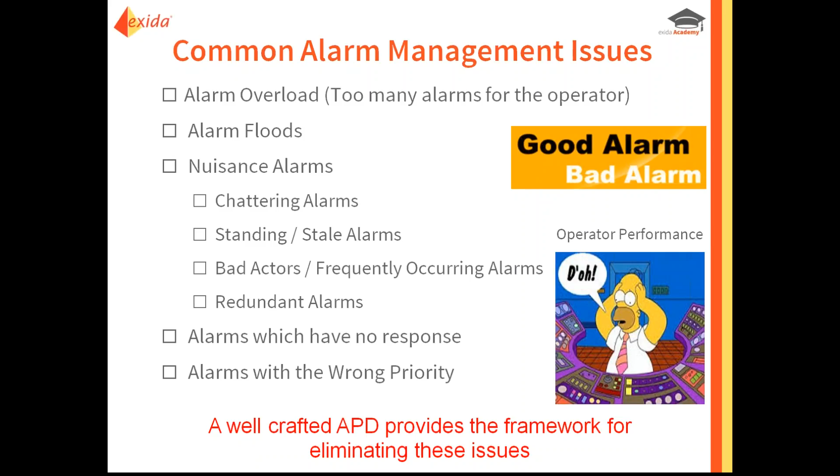So having an effective alarm management system is key to help your operators do their job the best that they can. And as I mentioned, one of the best ways is to start with an alarm management philosophy.

So let's turn our attention to the documents that define what we should do, the standards and their guidelines. Looking at the history of how that has evolved over time, the first alarm management document was really EEMUA 191, which came out in 1999 as a result of the Milford Haven explosion in the UK. That raised awareness to the issues and problems with alarm management and the need to provide solutions.

In 2009 in the US, the ISA 18.2 alarm management standard was released. This was a big difference from EEMUA 191, which was just a guideline and didn't necessarily have regulatory authority behind it, although it was treated kind of as a standard in some places. But the first true standard was really ISA 18.2 in 2009.

After that came out, there was a series of technical reports defined and created by the ISA team, which went into more detail about some of the specific elements of the alarm standard. The ISA 18.2 standard was then used as the starting point for the creation of an international standard, IEC 62682, which was published in October of 2014. The IEC standard builds on what was in ISA 18.2 and makes some changes, some of which we'll talk about. And now, every 5 years, standards need to be reviewed and updated.

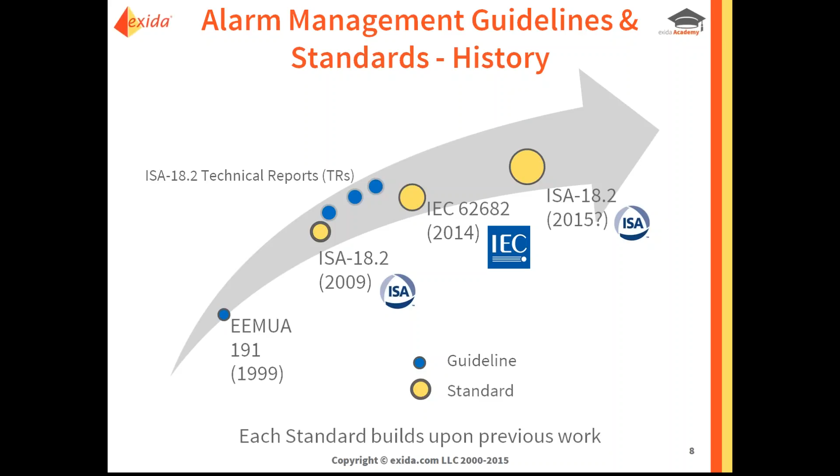So we're actually in the process of reviewing and updating the ISA 18.2 standard, and what we're starting with as input for changes are the new things that came about in the IEC standard. Hopefully what you can see is that this is an evolving process. Each new standard builds on what was done with the previous work. In general, we try not to conflict with what was done, but to build upon and add to it, and I think you'll find that with the IEC standard, as well as what's coming in the new version of the ISA 18.2 standard.

So for this discussion, we will focus primarily on the 2009 version of ISA and the recently released IEC standard. Both define a concept called the alarm management lifecycle, which is the workflow for alarm management. It describes the key activities, the key stages of the lifecycle, what happens during each of these, and how they work together, how information flows from one activity to the next.

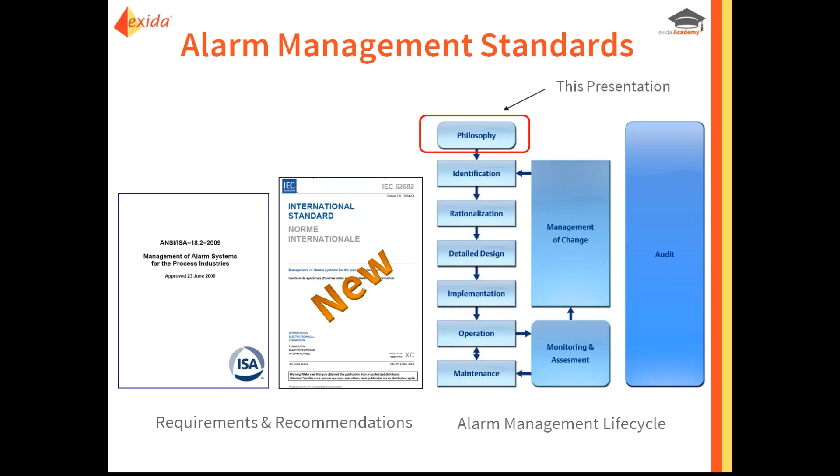Now for this presentation, we're going to focus on the first stage of the lifecycle, which is called philosophy, and how to create that alarm philosophy. It's not necessarily where you always start alarm management activities, but in many cases it either would be the first step or certainly one of the first few steps in developing a program.

Now both standards share a key element: establishing a clear understanding of what an alarm is and what an alarm is not. Providing a definition and reinforcing that definition is critical throughout both of those standards. So let's look at what they've defined as the definition for an alarm.

It should be an audible and/or visible means of indicating to the operator - and I've underlined the word operator to reinforce that for an alarm, the target audience is the operator, not the engineer, the maintenance person, or plant management. So everything that goes through the alarm system needs to be understandable and actionable by the operator.

An alarm also needs to indicate an equipment malfunction, process deviation, or an abnormal condition. Abnormal is underlined because it reinforces the fact that an alarm is supposed to represent an unexpected event, not an expected event. Something needs to be wrong. And last but not least, it requires a response.

One of the major changes, if you call this major, in the IEC version of the standard is the introduction of the word 'timely' into that last portion of the alarm definition. Going forward, it is very likely that that will be adopted in the ISA version as well.

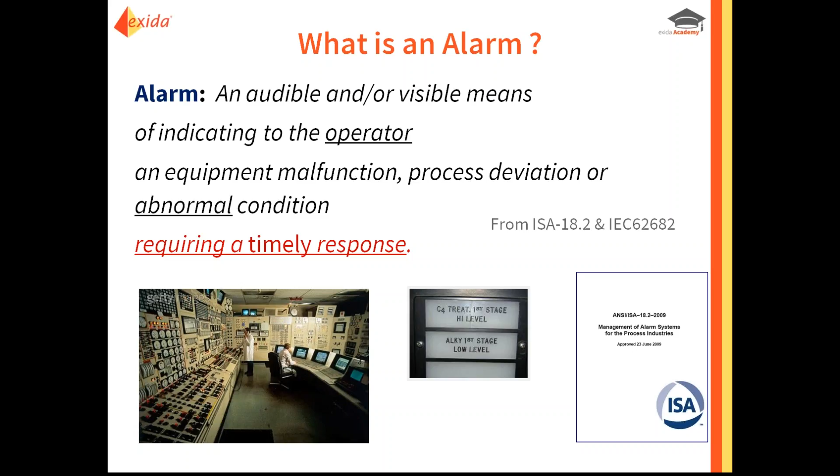So that's the definition. Both documents, in Clause 6, define the contents of what is supposed to be contained in an alarm philosophy document, and here you can see a lineup of those different topics. This is just a recommended set; it doesn't necessarily mean that these are the only things that should be included.

But you can see that each standard defines for each topic whether it is a required portion of the philosophy document or recommended. If you compare the two standards, ISA 18.2 and IEC, you'll see that the IEC changed some of the recommendations to requirements.

So several of the sections went from being recommended to required, references and alarm documentation in particular. Another thing you might notice is that at the very bottom of the screen, there's a line item called alarm system audit.

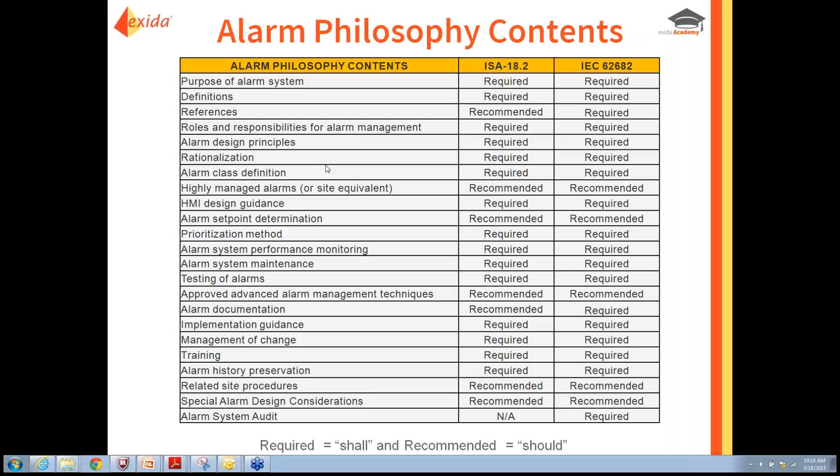So let's continue to move on here. One of the next questions might be, how would you structure the alarm philosophy document so that it makes the most sense and is most usable by the people that would be reading it?

Our recommendation is to lay out the sections so that they actually follow the alarm management lifecycle. The alarm management lifecycle has major stages called identification, rationalization, HMI design, for example. That should correspond to a section in your alarm philosophy document. That way you show clear traceability.

We also recommend that any relevant content be put in that appropriate lifecycle stage. So for example, if you're talking about how to prioritize alarms or what priorities will be used, since prioritization is a task within alarm rationalization, it would likely make most sense for that content to be in that section. So that's what we recommend.

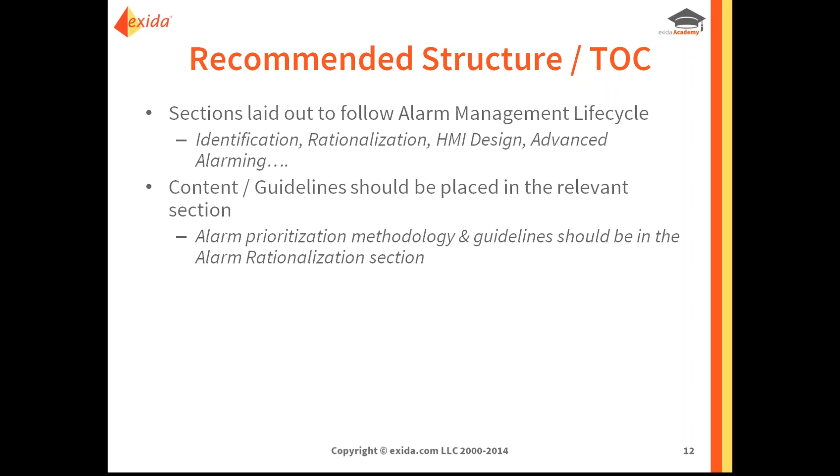In addition, we also recommend making sure that the required and recommended content from that table we just looked at is also covered explicitly, either worked into the alarm management lifecycle hierarchy or given its own section. We also recommend that you choose your section titles to make it clear what part of the lifecycle or topic from that list they cover.

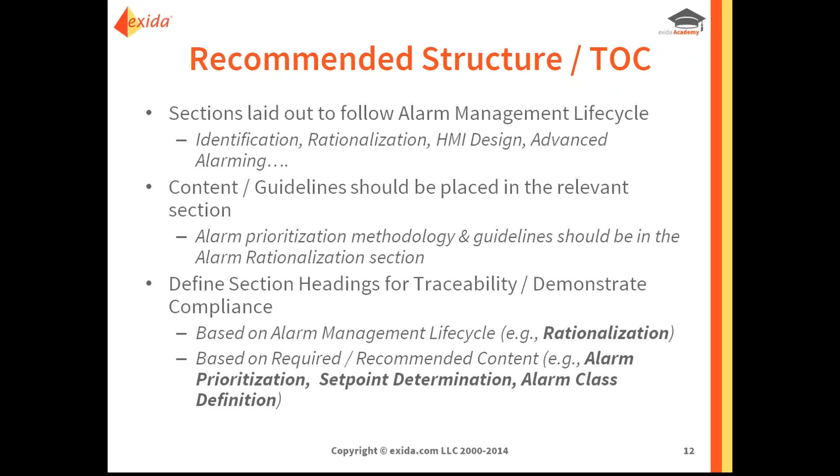For example, the list of content defines things such as alarm prioritization, set point determination, and alarm class definition. To maximize traceability, we would recommend creating specific sections on those topics with the relevant content, and putting that in the rationalization section, since that's the lifecycle stage where those activities take place.

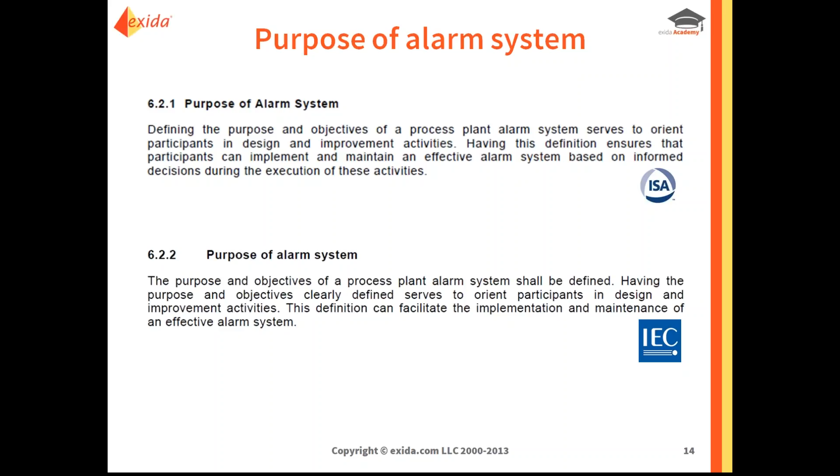Now let's move on and look at some of the specific content that's required or recommended in the standard. The very first item on the list was defining what the purpose of the alarm system is. Here you can see the guidance provided in Clause 6 from both standards, basically very consistent in what it says, highlighting that the purpose of the purpose is essentially to help people understand or get on the same page as to what you're trying to accomplish with the alarm system.

One example we start with, or offer as a starting point, is this declaration of what the purpose of the alarm system is. Obviously this is not rocket science, but the real goal is to make sure everybody has that shared vision of what they're trying to accomplish. A lot of what goes in the alarm philosophy is for the purpose of creating common understanding.

Because remember, this is not just for the process control engineer or the person doing the DCS configuration. This is also for operations, for maintenance, for subcontractors. So there's a lot of people coming in with different preconceived notions of what an alarm is supposed to be or how you do alarm management. So a lot of what goes in your philosophy, its purpose is to get everybody on the same page.

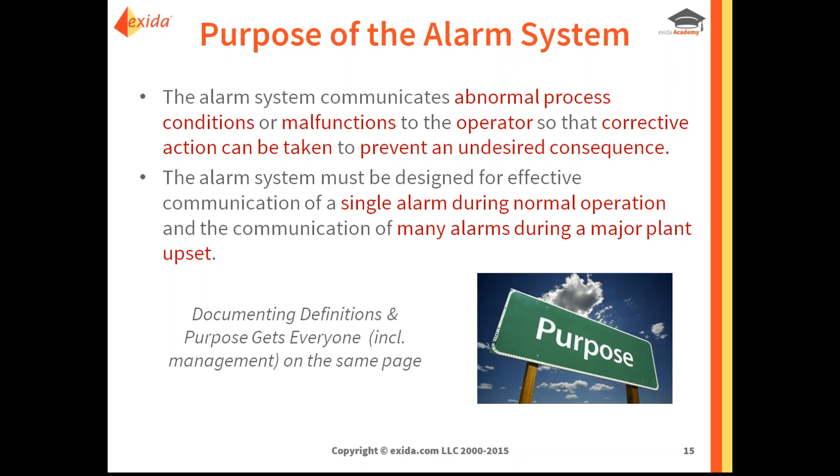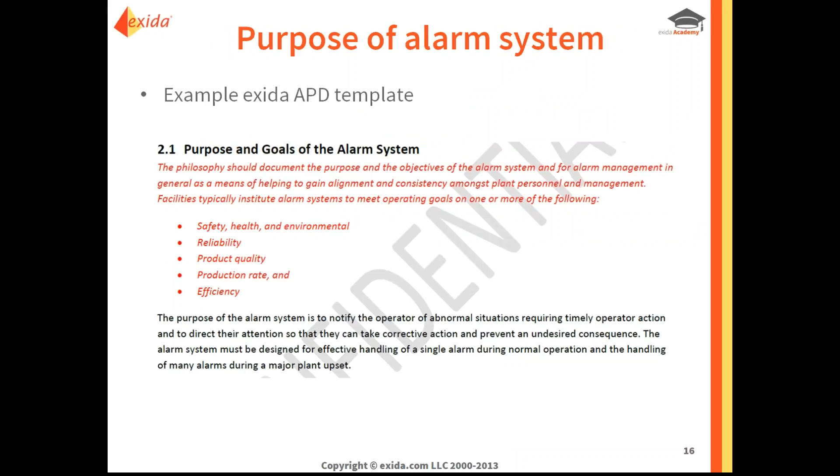Here's an example again from the Exida philosophy template of how we chose to address that, again with the specific example I showed before. In many cases, folks choose to extend that initial discussion, that initial text, with specific requirements around how the alarm system supports whatever goals they have for safety or reliability and things like that.

So that's what we typically recommend as a starting point.

Moving on to the next section, there's requirements for definitions. Part of the reason this is in here is to make sure that everyone gets a common understanding, or arrives at a common understanding, of what you're trying to accomplish in regards to the terminology that you're using.

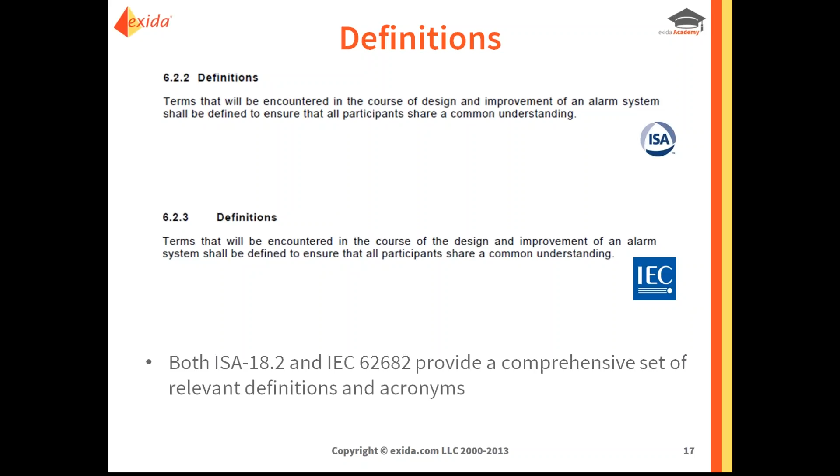Both standards provide a pretty comprehensive set of relevant definitions and acronyms. As part of your philosophy document, I would recommend including those relevant definitions in your philosophy. I've seen in some cases where folks use separate documents for terminology, but I think that takes away from the usability or the ability for the philosophy to stand on its own if you don't have all of the key alarm management definitions included in it.

The next topic to discuss is roles and responsibilities. Both standards have requirements for what is supposed to be addressed there. This is a required section, and as part of it, there are four different roles, responsibilities, or tasks that are defined that need to be explicitly called out in your philosophy.

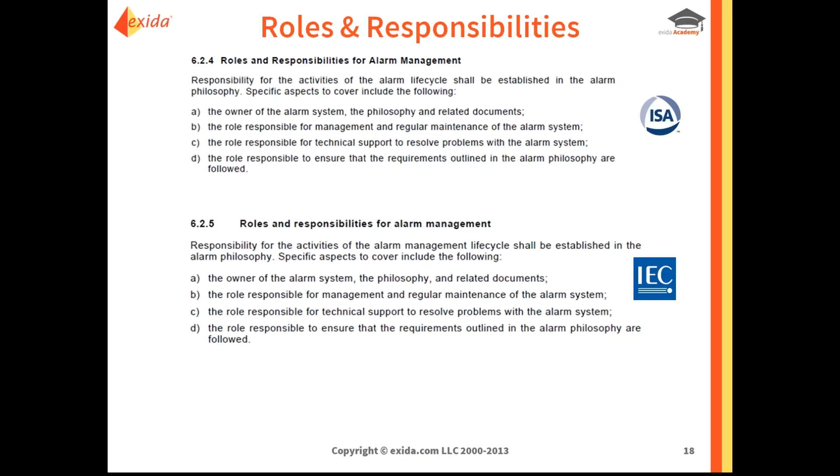So it is important to cover in your philosophy discussion of roles and responsibilities: who is considered the owner of the alarm system, the philosophy, and any other related documents, who is responsible for technical support, things like that—all with the idea of helping you create a framework for a sustainable alarm management program.

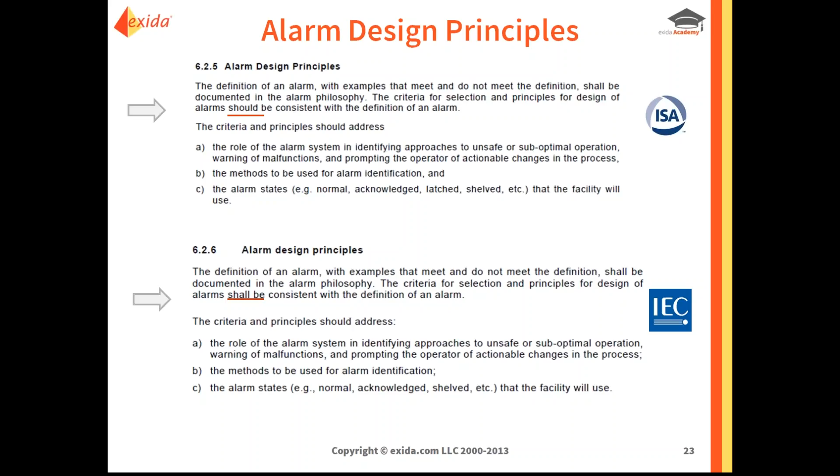It's required. One thing you'll find when you compare the ISA standard to the IEC standard is that there were several areas where recommendations were changed to actual requirements. So what does that mean? Part of what it means is that this section is driving not only to describe what a good alarm is, based on the definition we looked at earlier, but to provide examples and guidance to help you understand what is a valid alarm and what is not.

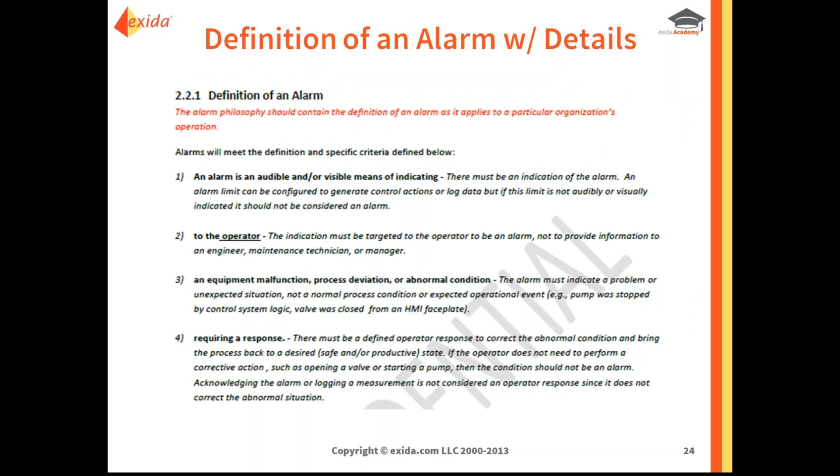In some cases, examples of things that are not alarms is even more important than putting in examples of what would be an alarm. The idea is to create a clear and understandable set of guidelines to help people uniformly understand what notifications meet the requirements to be an alarm and which ones do not.

Another way to handle that discussion is to think about dividing up the notifications that operators get into alarms and other types of notifications such as alerts, prompts, and messages. You don't necessarily have to go forward with definitions according to all these different categories, but the idea that you have all these different types of notifications, and that they're not all alarms and shouldn't all be presented to the operator as if they are alarms, is pretty important.

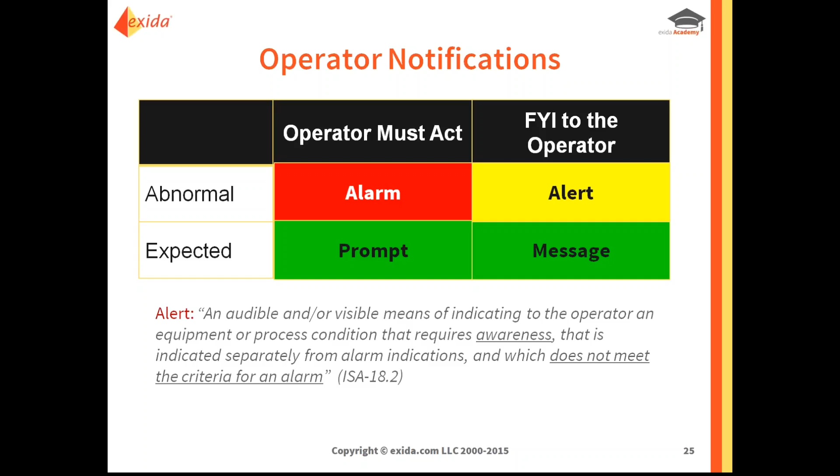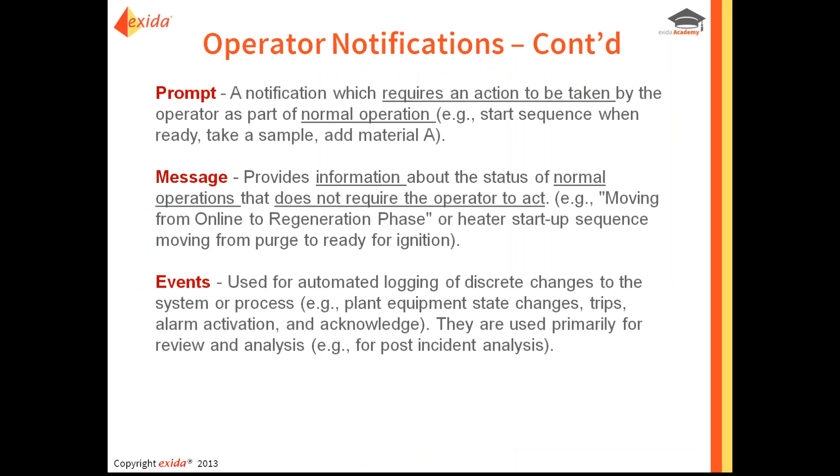So then you can consider putting in examples of things that don't meet the criteria for being an alarm, such as prompts or messages, whether just for informational purposes or for expected conditions, so that it's pretty clear when you're going through rationalization, when you find something that doesn't meet the criteria for an alarm, everyone uniformly understands why.

You also want to make sure that you're defining your key design principles in this area of the document. Things like making sure that every alarm has a defined response, what the operator should do, which is a key outcome of rationalization.

Making sure that there's sufficient time for the operator to respond to the alarm—not too little and not too much either. Remember, the definition of an alarm was changed to include the word timely. So an alarm that the operator has too much time to respond to is not a well-designed alarm for various human factors reasons. You also want to make sure alarms, when they're presented to the operator, are useful, relevant, and unique.

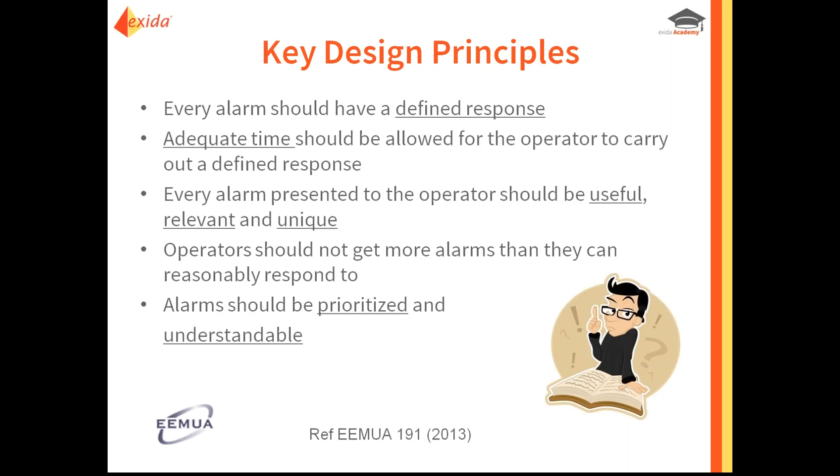In the philosophy, you should describe why that is and what that means. You want to make sure operators don't get more alarms than they can realistically deal with, and make sure everything that comes through the alarm system is prioritized and understandable. So those are some examples of typical design principles that you would want to include in that section.

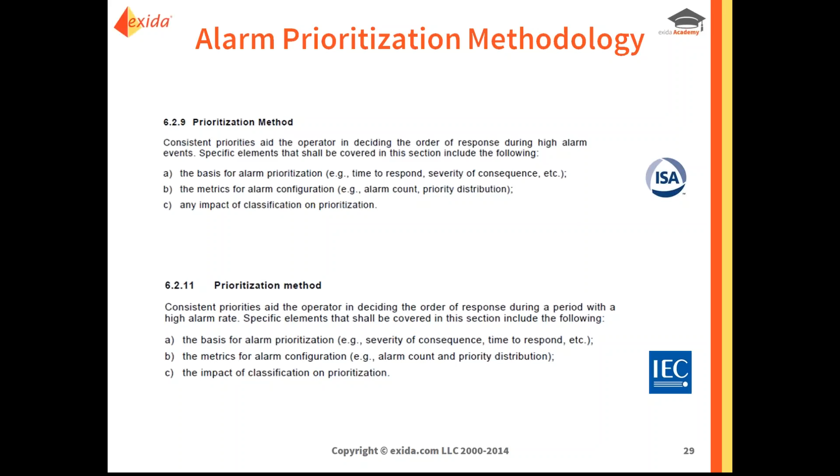Now moving on to alarm prioritization. Again, very similar requirements in both standards regarding how you should prioritize alarms or what you should do. Typically, the basis of the prioritization is on time to respond and severity of the consequences. So now let's look at how to put that into practice.

Priority is very important within the alarm system. It's one of the most important elements of an alarm because it helps the operator know the level of urgency or criticality to their response. Primarily from the point of view that if you have multiple alarms present or occurring at the same time, it tells them which one to respond to first. That's what priority does. So there needs to be a means for objectively and consistently coming up with that prioritization.

What's recommended in the standard and what's typically done in industry is to evaluate the priority based on analysis of the severity of the consequences in predefined areas and the amount of time that the operator has available to take corrective action, measured from the moment the alarm occurs to the last moment in time that the operator can take action and prevent the consequence from occurring.

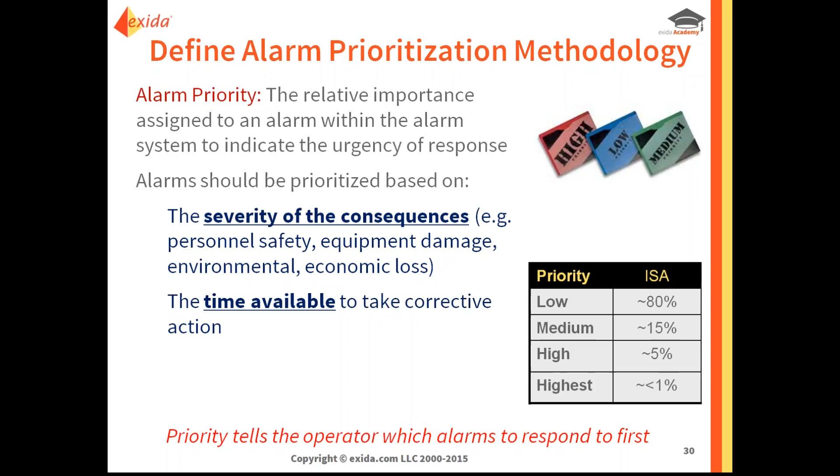To make prioritization effective, we want to make sure that there's a small fraction of all the alarms that are high priority, recommended at 5%, with the majority of the alarms being in the lower priority. This helps differentiate those alarms that require more attention by the operator from those that are just one of the pack. A typical prioritization method then uses a matrix similar to this, where we've got our consequences described at the top, and our time to respond buckets at the bottom, with information on how to define the priority inside.

Now when we create this consequence matrix, you have to make sure that all of the consequences in a certain column are equivalent. If you look at them, they look like they are equivalent, because essentially alarms that appear with those same consequences could very likely end up with the same priority, in which case it'll be up to the operator to use their judgment on which one to respond to.

So in this case, we would look and see that in the same column, we have a consequence of fatality that's in line with a financial consequence of $500,000. One could look at that and say that's kind of putting a value on human life. In that case, if you look at it from that point of view, it doesn't seem to be consistent. So this would be an example of probably not a good consequence matrix.

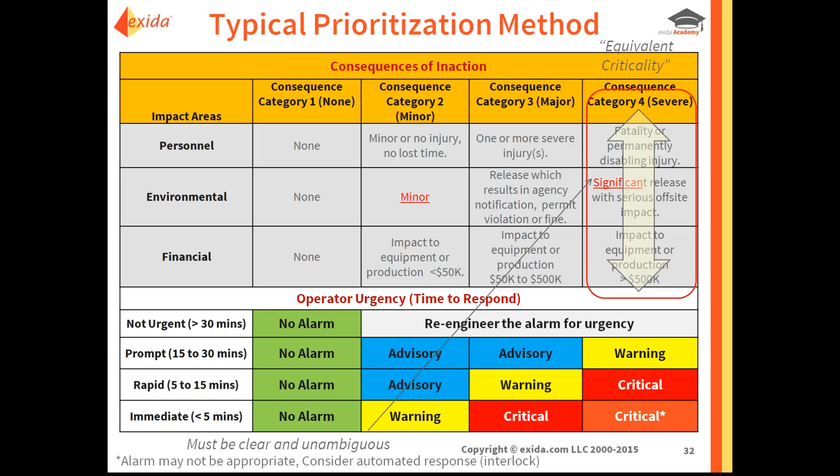We also want to make sure that everything that goes in there is pretty explicit and not ambiguous. Words like significant or minor mean different things to different people. The whole idea of creating a matrix like this is so that when you go through prioritization, everybody comes up with the same answers, the same results over and over again. It's a consistent, objective process. And if you're using ambiguous terms as the starting point, that can lead to problems down the road.

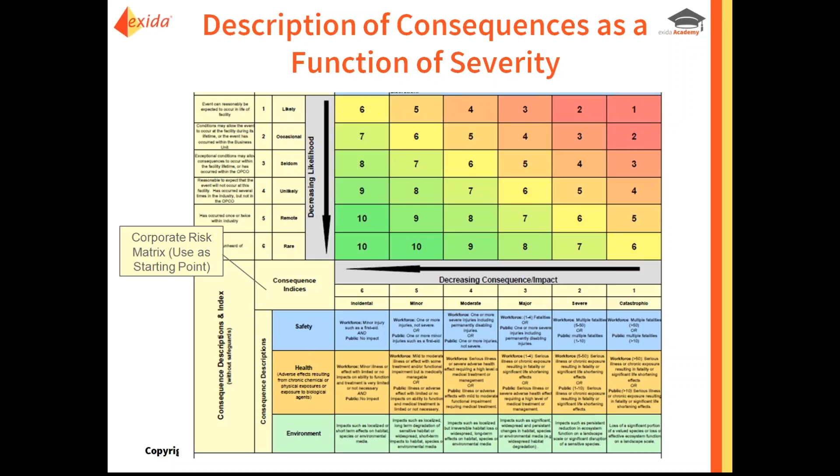One place that we would recommend to start in the development of that consequence matrix is from a PHA or risk matrix. Definitely a good starting point. It's got the right kind of things in it. It may need to be modified so that it works acceptably for alarm rationalization, but we always recommend that be looked at as the starting point.

So here's also some examples of how to make those consequence descriptions more explicit, to make sure that it's easier for people to come up with when they're evaluating the consequences, what the severity is.

The other thing to think about is what are the different time response thresholds for operator response time. This is dependent on the plant and the process dynamics and what things the operator can do, whether they need to make all their actions from within the control room or whether they have to go outside throughout the plant. So you define 3 or 4 different thresholds, one being, for example, an immediate response. What does immediate mean in the context of your process to your operator? It may mean up to 5 minutes, and it would mean to the operator that, hey, if you see this alarm come in, you've got to drop whatever you're doing and respond immediately, or respond right now.

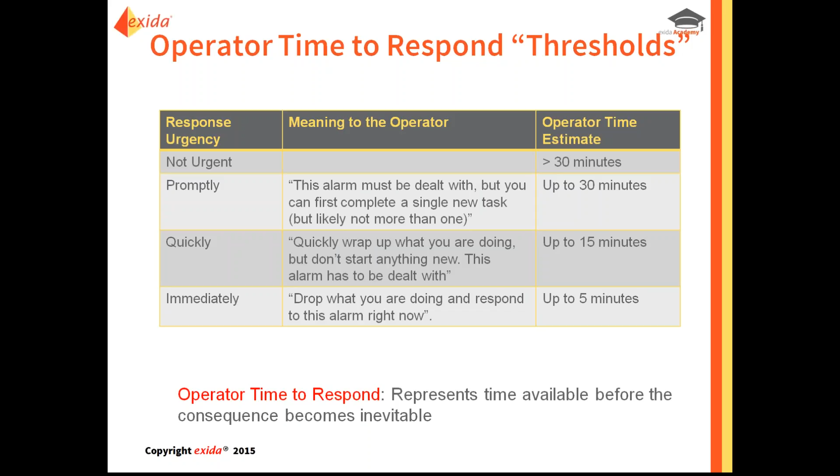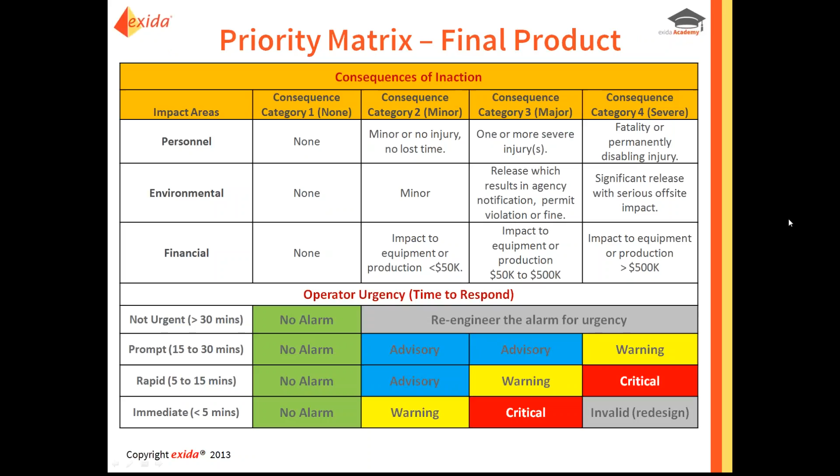So that's what that conceptually means. You want to set those time to respond thresholds in a way that they make sense to your operations team and is consistent with the way they would view it. So what we ultimately end up with is a matrix like this, where we've got our consequences, our time to respond buckets, and also our priorities defined within our matrix.

In addition to that consequence versus time to respond matrix, not all of your alarms can be prioritized using it, or not all of them should be necessarily. As a governing entity, you can decide or define in this philosophy how you want to prioritize specific sets of alarms. So, for example, alarms that relate to personnel safety - lack of oxygen, gas detection, safety shower activation, H2S detection detectors - those are common ones where you might say that by definition, any of those alarms are going to be set to the highest priority, just as a rule. No need to go through that priority matrix, because that's what's in line and consistent with the way you want your operators to respond.

So it makes sense to define other potential specific scenarios of alarms and how you want those to be prioritized in cases where the consequence versus time to respond matrix may not be easily applicable.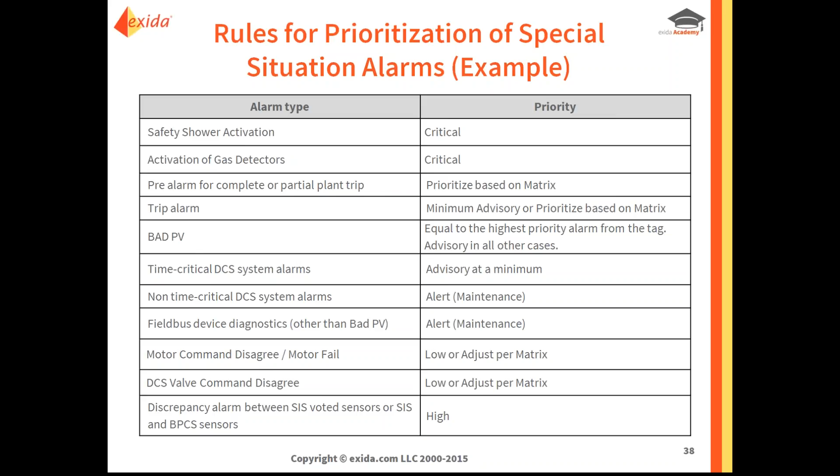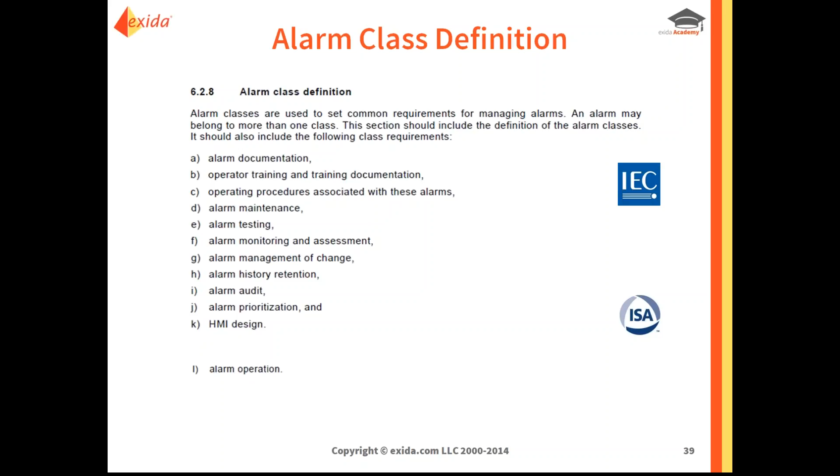So now let's move on to alarm class definition, another topic within the standards that needs to be addressed in your philosophy. Here we see the requirements for alarm class definition, pretty much the same between the IEC standard and the ISA standard, except for item L, which was in the ISA standard. So you can see, this is not just defining what classes you're going to have - and we'll talk about in a second how you might go about that - but it talks about that the whole goal for this is to help you manage and administer the alarm system, realizing that not all alarms are created equal. They may have different requirements for training and testing and management of change and audit. So that's really the purpose behind classification: to group alarms that have common sets of requirements that are different from your run-of-the-mill process alarms.

So how might you come up with what your relevant classifications are? There's a couple different ways to do that. One is to think about the different sources, identification sources, that may dictate the need for a potential alarm.

So for example, you might have an alarm indicated as a safeguard in a HAZOP, or an independent protection layer in a LOPA analysis, or as part of an environmental permit. The fact that they are described or defined in those documents indicates that they probably have different requirements than your run-of-the-mill process alarm and would require their own classification. And in a lot of cases, you'd set the classification based on how you identified them.

Another way to do it is based on the type of consequences. So if it's an environmental consequence or a personnel safety consequence, or consequences such as equipment reliability, reduction in equipment reliability, those are other ways to classify alarms. Also, potentially based on where the alarms originate from - if they're from uniquely different systems that by their differences would have different requirements, that's another way to potentially do it. So here's a list of some example classifications: personnel protection, environmental protection, equipment reliability, LOPA listed, or independent protection layer. You can see these illustrate some of the points that we talked about right before this.

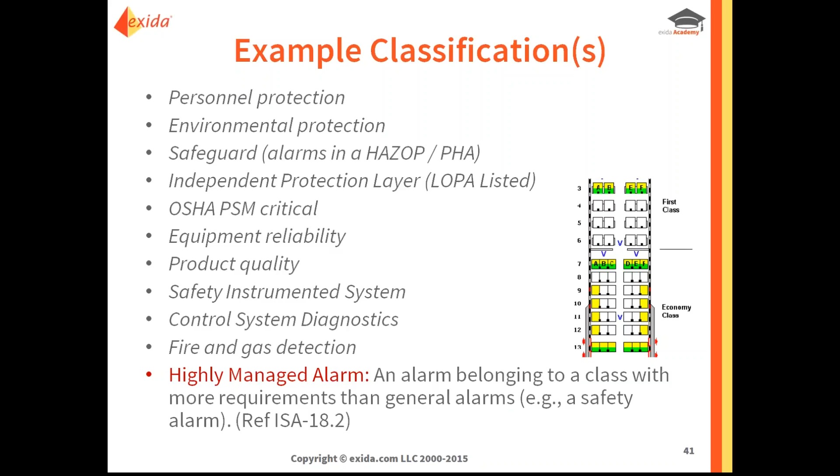Now, both standards define a concept called highly managed alarms. This means that there are certain classifications where you're definitely going to have stricter requirements than your general process alarms. This was initially created for the ISA standard with OSHA PSM in mind - if you had an alarm that was part of your OSHA PSM program, your mechanical integrity program, or needed to be there because of OSHA PSM, what are the additional or specific requirements it would need to follow as part of that program? So that's where a lot of this originates from. Of course, OSHA PSM does not translate into other countries, but every country has their own regulatory authority or body that has this same kind of idea of differentiating types of alarms and ensuring that they have the specific requirements needed to make sure that they're operational.

More on that in a second. As another element of the alarm philosophy, in addition to defining the classifications or coming up with which ones are appropriate, it's also recommended to provide a description of them and any key requirements to make it easier during rationalization, so people can look at an alarm and understand how they might assign it to a classification. What does it mean to be a part of a certain class? How do you determine that?

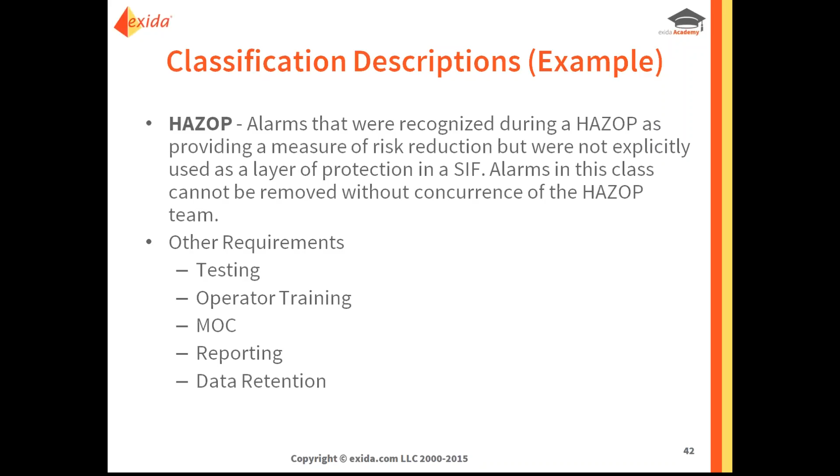And then with the idea that alarm classes are used to differentiate requirement sets, one good way to handle that is through a matrix such as this, where you've got your different alarm classes listed and their associated different requirements for specific areas like training or testing. Now, one thing that we will see in the IEC standard - it's much more strict in pushing that this kind of documentation be provided than the ISA standard. The ISA standard, this was more of a recommendation point of view. This is much more of a requirement in the IEC standard.

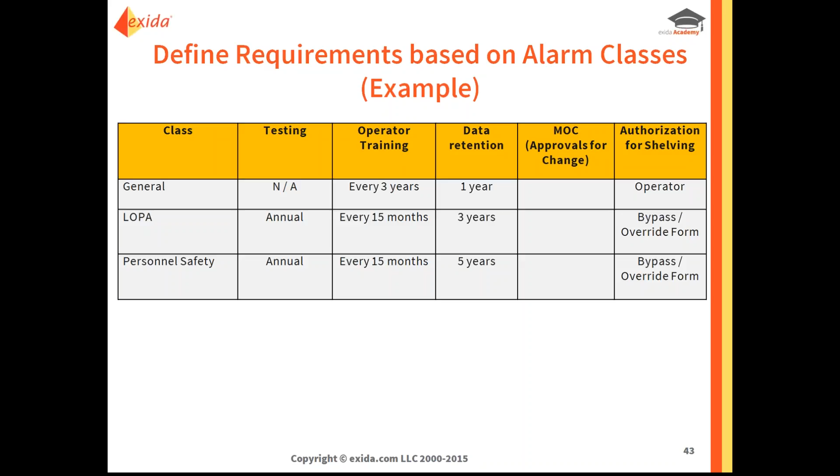And going back to the topic of highly managed alarms, any class that you defined, one or more classes, could be designated as highly managed. And if it is, there are specific requirements within both standards that they need to follow. Within the ISA standard, if you designate a certain class as highly managed, you'll find specific explicit requirements around things like shelving, out of service, testing, and training.

Some people are scared away by that. In fact, there are some people within the alarm management community that recommend staying away from the use of highly managed alarms. I don't necessarily think that's appropriate when you think about what its meaning is or what it's supposed to be used for. So if we think about the gas detector alarms or the lack of oxygen alarms, and if those were considered highly managed, some of these additional requirements - making sure that if those alarms are shelved or suppressed, they follow a much stricter authorization and approval process - makes sense when you think about what we're talking about.

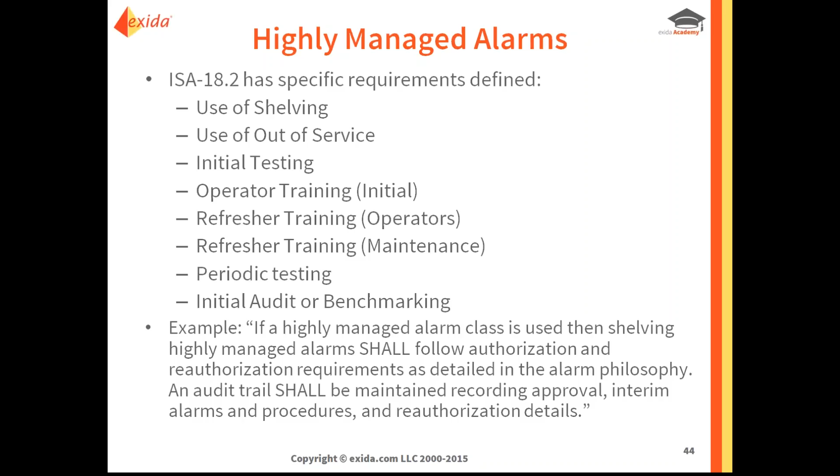We're talking about people being safe and not being hurt, and there's lives at stake with making sure that those alarms function as they're supposed to. So the fact that there might be more specific, rigorous requirements around how they are managed makes a lot of sense, and it's only in there to help people differentiate and to make sure that they're doing the best that they can with those types of alarms in terms of ensuring their integrity.

Moving on to the next area, alarm system performance monitoring. Both sections, both standards, have requirements in that area. Some a little bit different in the IEC standard.

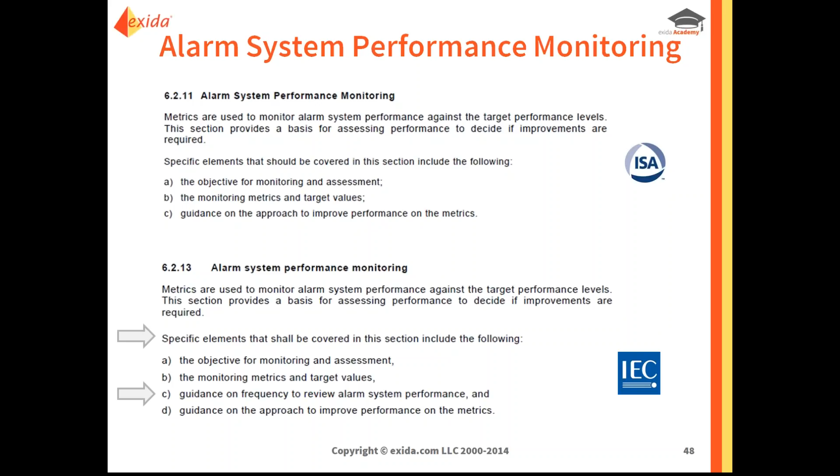Again, we go from a should to a shall when it talks about the specific content, and it adds another line item requirement for guidance on the frequency of how often you review alarm system performance. So the IEC standard is a bit more strict in its requirements and expectations than the ISA standard in this regard.

They both define a table of expected KPIs. You'll actually find that some of them are a little bit different. In particular, the ISA standard said 150 alarms per day. The IEC standard changed that to say 144, which is the precise calculation if you assume 1 alarm per 10 minutes. That may result in a bit of confusion to folks, but essentially it's the same meaning of 1 alarm per 10 minutes. For the ISA standard, that was rolled up to a round number for evaluation purposes of 150. The IEC standard changed that to be more specific: 144.

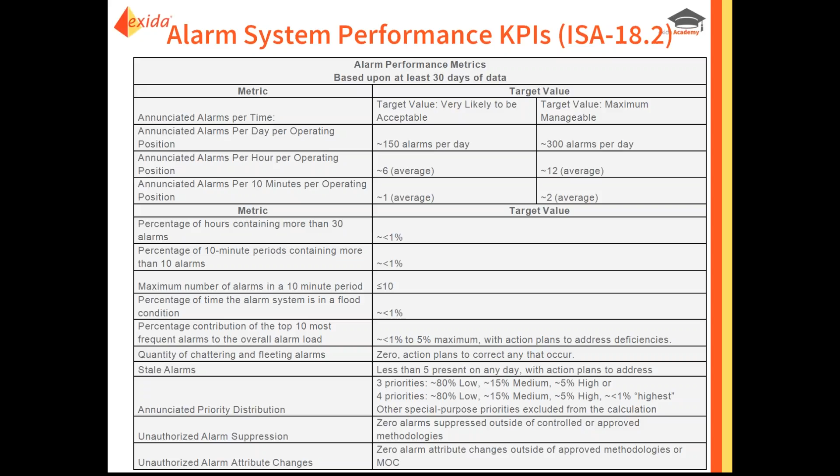Now, to comply with what both standards really want is to take the measurement of those KPIs and the evaluation of them and make that a process that's repeatable and drives action. One way we recommend to do that is to set up the table of your performance metrics or targets in this kind of format, showing both a column for target, that's what you're trying to achieve, consistent with the metrics we just saw, and then an action limit with the idea that any time performance is not within the action limit, you're going to take some actions to improve performance. So it's driving action.

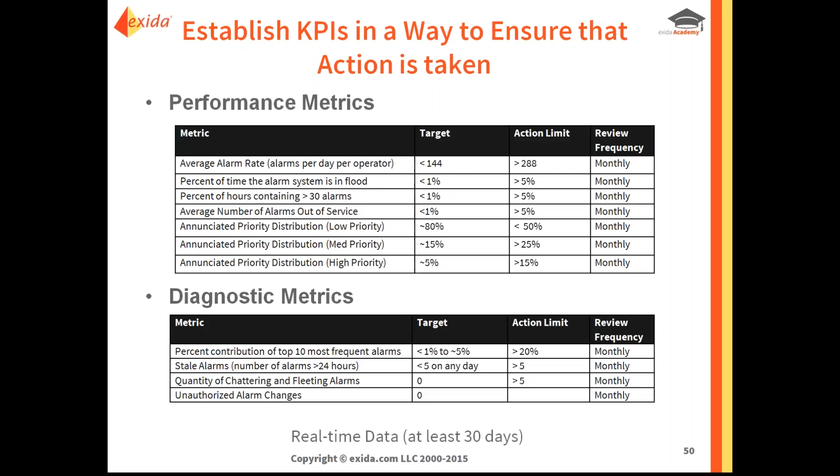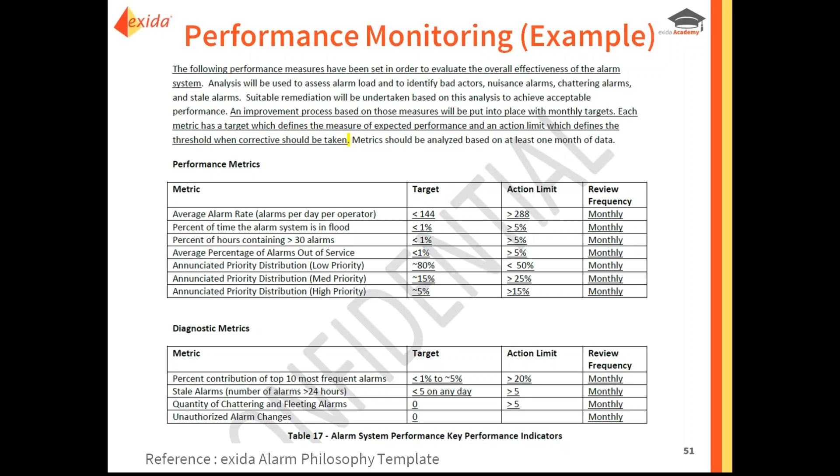It also shows the recommended frequency for how often performance should be reviewed. This is an example of how those requirements, particularly from the IEC standard, might be rolled into a philosophy discussion. Here we've got our metrics defined in the format I mentioned, with a listing of the review frequency. The text above talks about the purpose of why you're doing KPI monitoring and the processes for improving performance and remediation. So this is an example of a way to create a philosophy that meets those requirements and expectations of what should be defined in this section.

We would also recommend that you define what reports, KPI reports, or reports that contain the KPIs and help you better analyze what's really going on, that you define that in your alarm philosophy. What do you expect to be created? And then, again, with a goal of making this actually work, consider also defining whose role it is to create those reports and whose role it is to review them and propose changes. You want to make sure that you're not just generating data but not doing anything with it. It's got to be part of the process to make sure people are reviewing and taking action.

Now moving on to alarm system audit. This was the topic we mentioned at the start of this webinar, where there were no requirements defined in the ISA standard for philosophy, but there is in the IEC standard. As I mentioned, as these standards build on each other, you can expect that the new version of the ISA standard, which comes out hopefully later this year in 2015, will also have a section on alarm system audit and its associated requirements for going into the philosophy.

So let's take a look at what's there and what that means. The whole purpose of the alarm system audit is to really maintain the integrity of the alarm system. So you're reviewing your workflow processes and practices, you're assessing performance with operators, interviewing them, and the results might be changes to the design or potentially updates to the alarm philosophy.

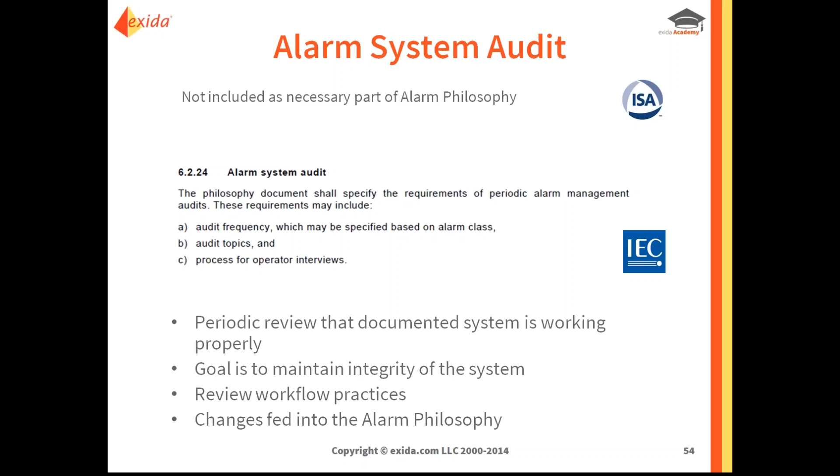If you find out that you're not doing what you said you would do, say you've got an explicit procedure or process for, let's say, management of change or operator training, and as part of the periodic audit you determine that you're not really doing this, then either people need to be trained on how things are supposed to go and behavior modified, or perhaps what you proposed in the philosophy is really not achievable, and the philosophy should, in fact, be updated. That's another point to say your alarm philosophy is, to some degree, a living document. It will evolve over time as your system changes and as your people change.

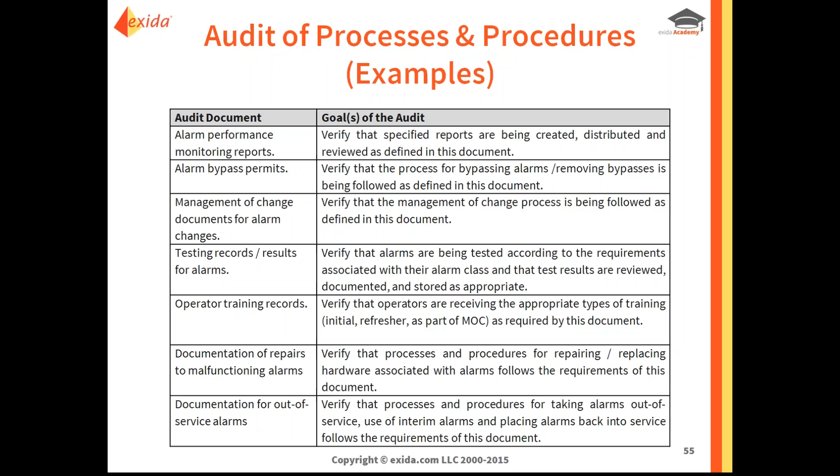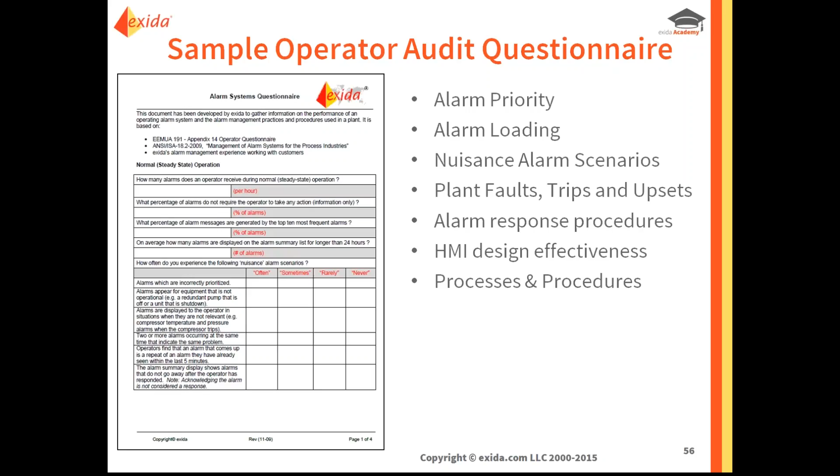Another part of the audit is reviewing performance from the operator's point of view. This involves speaking with them, interviewing them on topics such as whether they know how to respond to alarms and whether alarm messages are understandable. This helps you understand how well the alarm system is performing from the point of view of the target audience, since operators are the users of the alarm system. Assessing how things work from their point of view is a good way to drive continuous improvement.

Another recommended part of audit and management of change is to periodically compare the alarm settings in the actual control system, the DCS, versus those in your master alarm database. The master alarm database documents the results of rationalization—when you've defined the priority and limit for a certain alarm, that information is documented there. Periodically comparing the two to make sure they're synced and consistent is also part of the audit process.

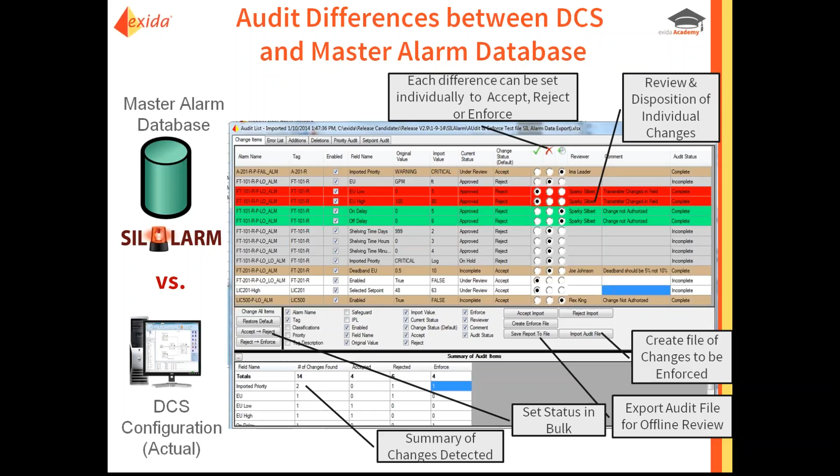Next, we have two or three more topics we'll go through today. We just picked a few. Certainly going through all the different sections and requirements would require a much longer discussion, so we wanted to pick out a few and go through them.

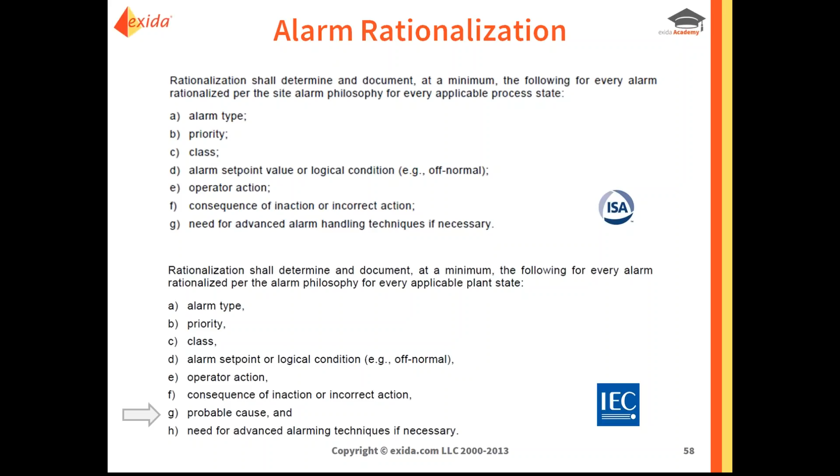Next we'll talk about alarm rationalization, definitely an important process that has a significant impact on improving alarm system performance. A significant change from the IEC point of view is the addition of one more piece of information that's supposed to be documented during rationalization, and that is the probable cause.

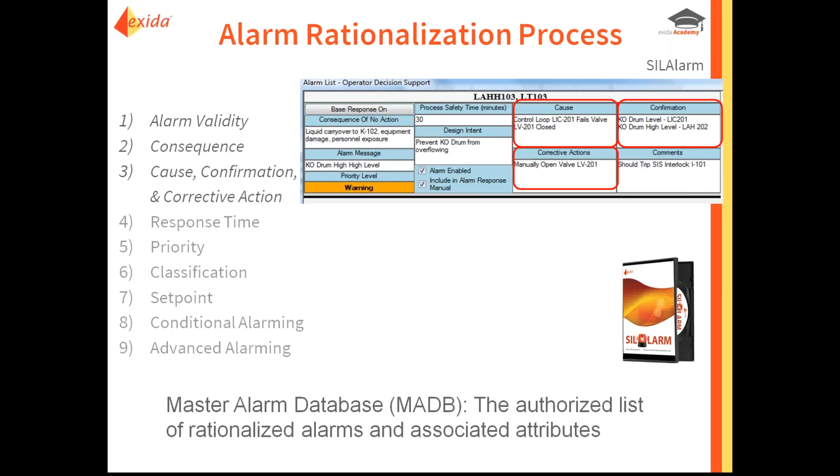As part of your philosophy, we recommend that you define what your rationalization process is, to whatever degree makes sense. It could be something such as: first assess the alarm validity, then evaluate the consequences, then the cause, confirmation and corrective action, and then the operator response time. Also document any specific requirements related to capturing this information in a specific tool. In this case, we're showing the SILAlarm tool from Exida, and how it would work to capture this information from rationalization and retain it in that master alarm database concept I mentioned earlier.

Also within the philosophy, in addition to the process, certain key areas relate to rationalization, such as how you determine whether an alarm is valid, necessary, or justified. Here's some recommended criteria we typically suggest using: a series of questions that can be asked for each alarm, and if you can't answer yes to the question, it helps weed out alarms that don't belong or shouldn't be an alarm.

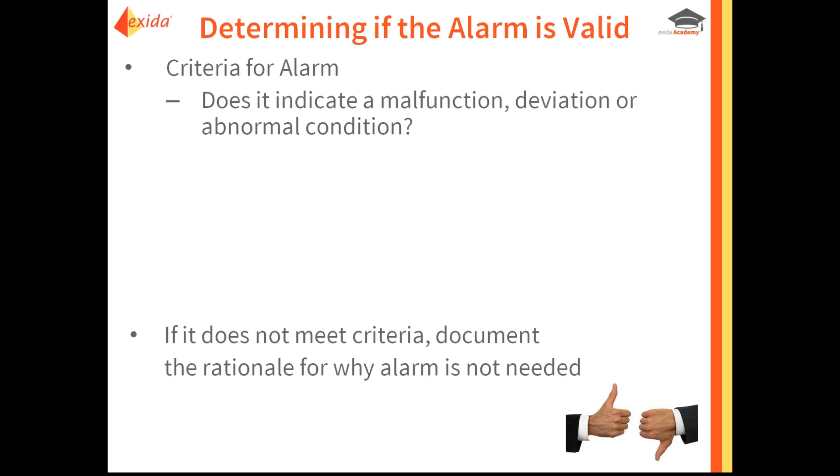Questions such as: does it indicate a malfunction, deviation, or abnormal condition? Yes or no—if you can't answer yes, it probably shouldn't be an alarm. Same for: does it require a timely operator action to avoid defined consequences? These questions are formulated from the concept of what an alarm is supposed to be. That definition we looked at earlier helps define the criteria for determining whether something is a valid alarm or should be implemented as an alarm or not.

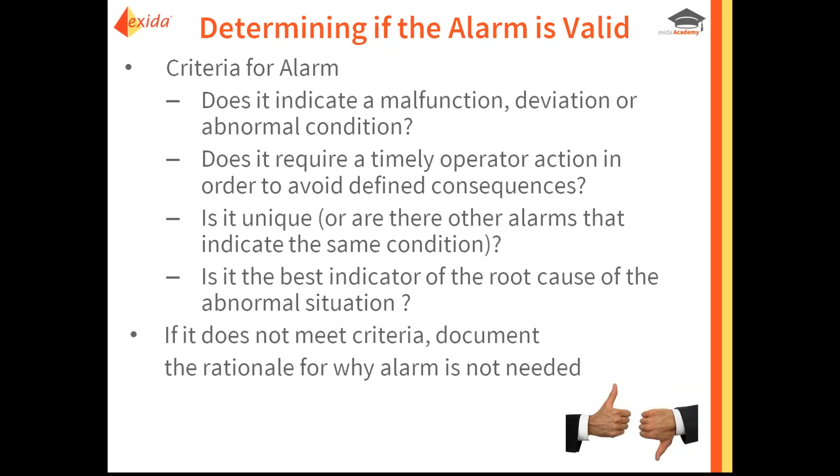We definitely recommend putting that into your philosophy document, along with guidance on the different ways to consider how you define a cause, a consequence, a corrective action—what type of information you're looking for, what level of documentation you expect. In particular, we recommend documenting how to determine the consequence of inaction and what consequence you're looking for in the context of rationalization.

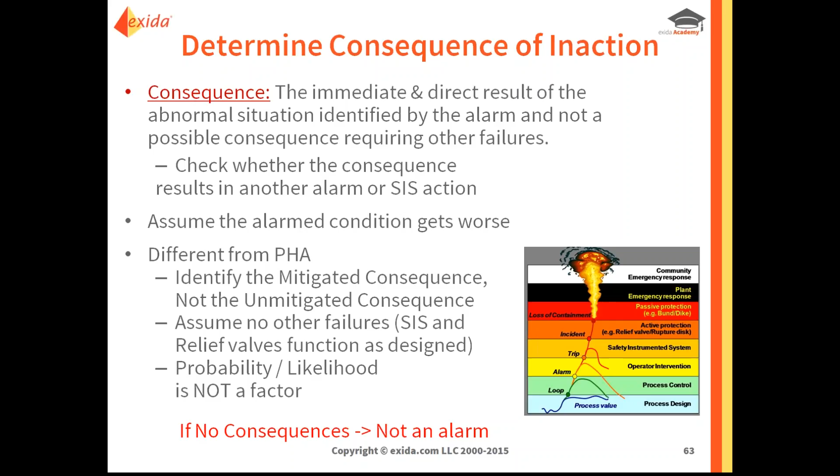Part of the reason this is really important is because it's a different mindset than the consequence assessment process used during process hazard analysis. You want to make sure folks who do both, or who come from a safety mindset, understand the difference between the consequence you're looking to establish during rationalization versus that used in a PHA.

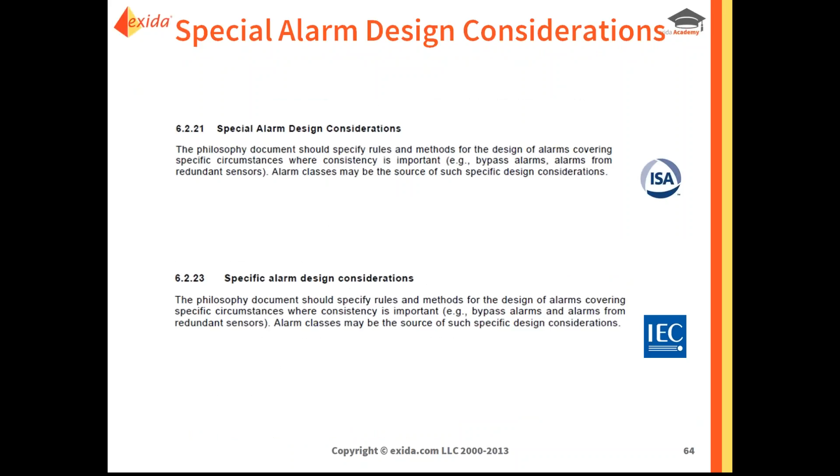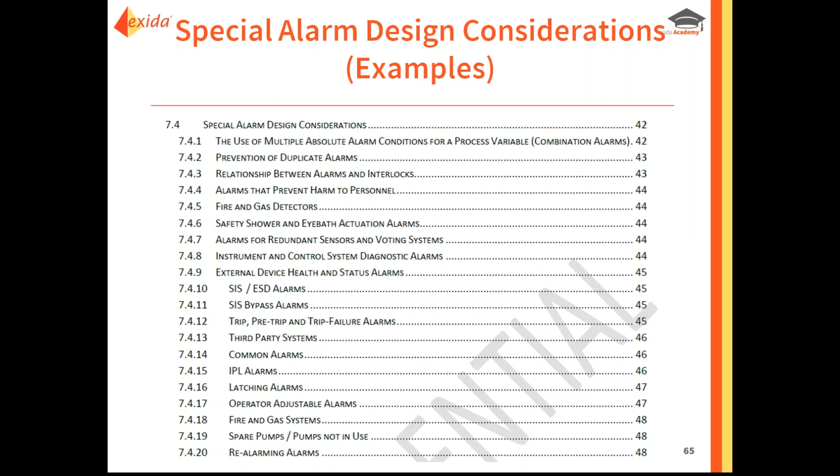Then there's another section on special alarm design considerations. The idea is to have a section in your philosophy that gathers together specific requirements for certain recurring types of alarms or scenarios. Here's an example, a menu of potential special alarm design categories, different recurring types of alarms within the system and how you want to address their design and implementation from a consistent point of view.

Here's an example of what's defined in the Exida alarm philosophy template. You've got information about the use of alarms and interlocks and how they should be separated or designed. Also things such as alarming for fire and gas detectors and the expectations and requirements about that - specific requirements for certain types of alarms.

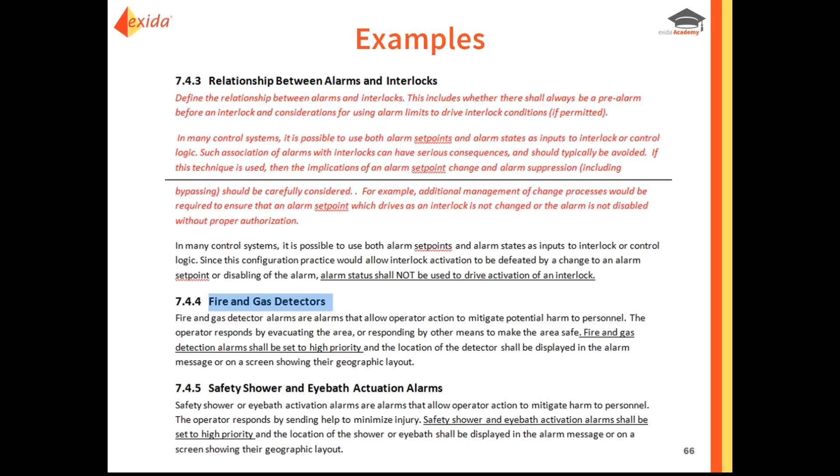Alarm response procedures. Similar to what we saw with Audit, this topic is not included in either the ISA or IEC list of requirements as it pertains to a philosophy. So it was not in the original ISA, not in IEC, but I expect that it's going to be added to the 2015 version of the ISA standard because this is such an important concept within alarm management. There are other requirements about alarm response procedures within the document, and that's part of the reason why it may be added as content that should be addressed in the philosophy.

Here's some of the requirements as they come from different sections in those two standards. These are pretty important: alarm response procedures shall be provided to the operator - so this is a requirement to do this. And alarm response procedures shall be readily accessible - again, a requirement to do this.

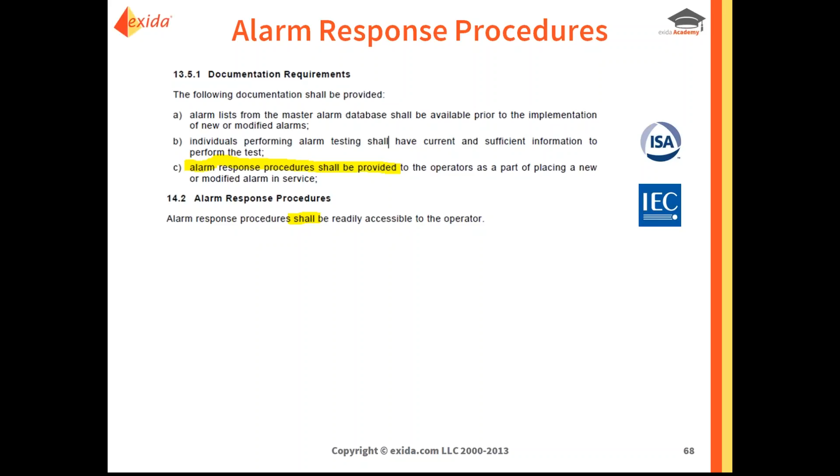Now, in terms of what information goes into an alarm response procedure, it's a little bit different between the ISA and the IEC - just a couple of rudimentary pieces of information. But if you look at what's expected, it's really the information on what's the alarm limit, what's the potential causes of the alarm, what's the likely consequence if you don't respond, what's the expected corrective action, how much time do you have to respond, and what's the alarm class.

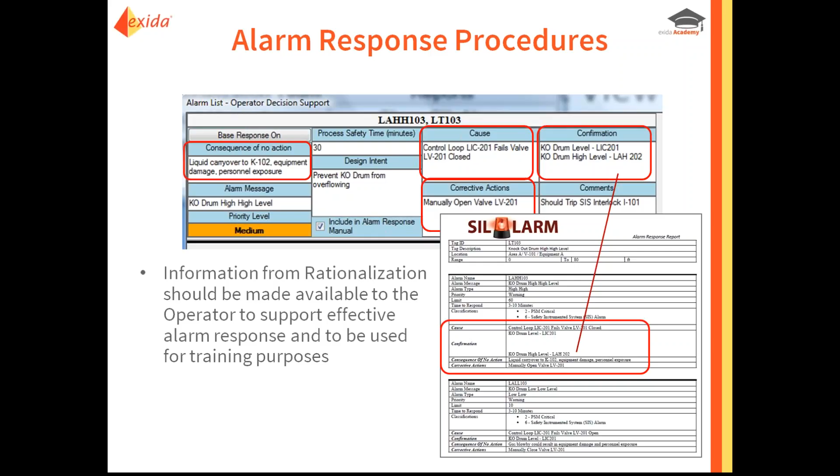All of this information is things that are recommended or should be part of this alarm response procedure. So one of the ways to think about this is actually the information that you talk about and document during rationalization. The creation of an alarm response procedure becomes relatively easy and straightforward if you can do it from the results of rationalization, which is where all that information is defined.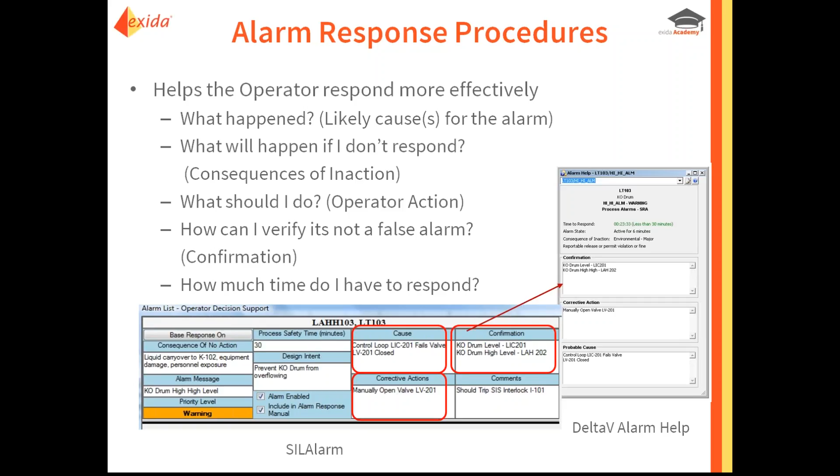So we can do that within SILAlarm to create PDF documents. There's also different DCSs that now provide a way to show the alarm response procedures to the operators directly within the HMI. One example here we're showing is DeltaV system, their alarm help faceplate, where we can push the information from rationalization directly into that to provide that level of information.

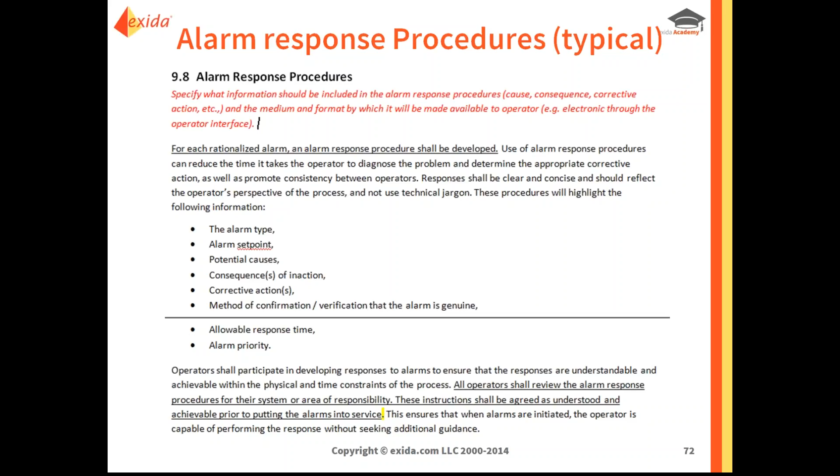Again, here's an example coming from the Exida alarm philosophy template on the requirements and such around use of alarm response procedures. In addition to the information that goes in it, we also add in the expectations of how the operators are involved in it - whether it's participating in the rationalization process or reviewing these documents before startup or as part of their shift, with the idea that perhaps they should be familiar with them before the alarm is commissioned, or to make sure that they're comfortable with those procedures. So the idea is to define not just what goes into the procedure, but how they're used, how the operator interacts with them, and the expectations thereof.

In addition to alarm response procedures, there's also specific content in the philosophy on alarm shelving. I also expect that will be changed in the 2015 version of the ISA standard. Shelving, or manual suppression, is a way for the operator to temporarily remove an alarm from view when it's a nuisance alarm or something like that. It's a very powerful tool to help them deal with or manage alarm upset situations.

As part of the philosophy, you should define how you're going to take advantage of or use that function or process - considering things like what alarms can be shelved. Maybe it's different depending upon the class of the alarm or the priority. And then what is the process for shelving? Does the operator need authorization? Can they do it on their own cognizance? Do they need to document why they did it? All of this information needs to go into, or should go into, the philosophy document.

Now, shelving itself as a function was a recommended capability for a DCS to have in the ISA standard. That was changed to become a required function in the IEC standard.

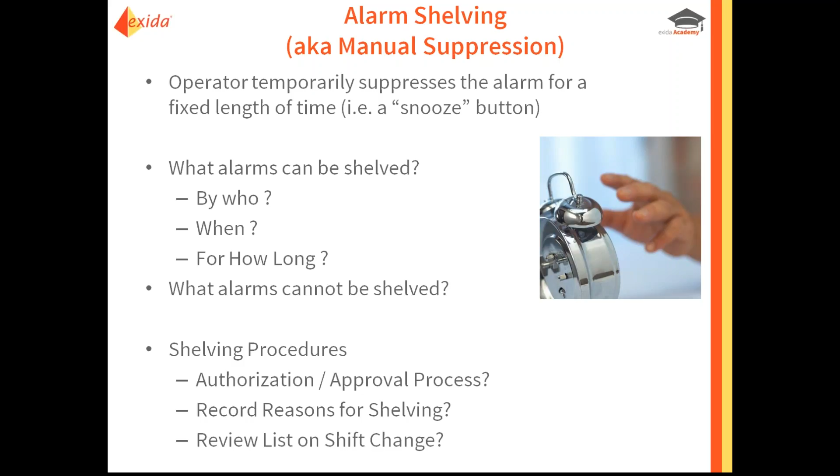So certainly the push for people to use this functionality and recognition of how important it is only reinforces that you should address this in your philosophy and consider how you're going to use it. So certainly information such as this, not only what alarms can be suppressed or shelved, but also around the procedural use of it. So things like operators should look at a list of all the alarms that are shelved before they start their shift or as part of shift handover. So not just use of this function, but how it works itself into your operational process on a day-to-day basis.

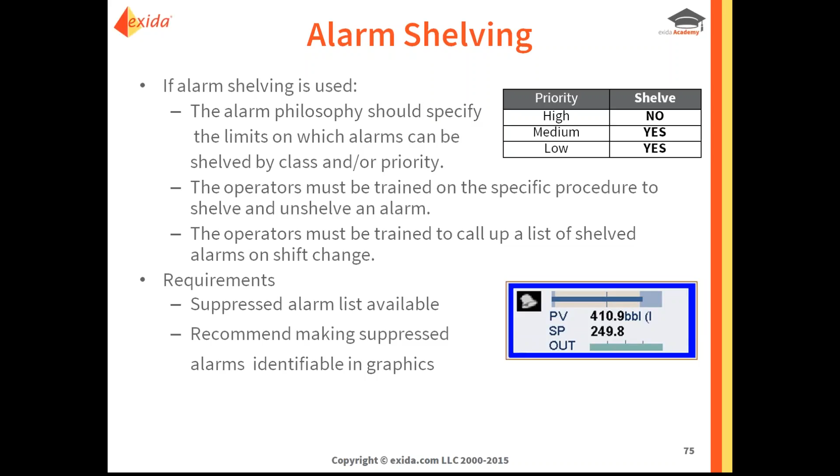So kind of in the home stretch here, I realize that we're running a little bit late. Just kind of summarizing some of the other things that we talked about here.

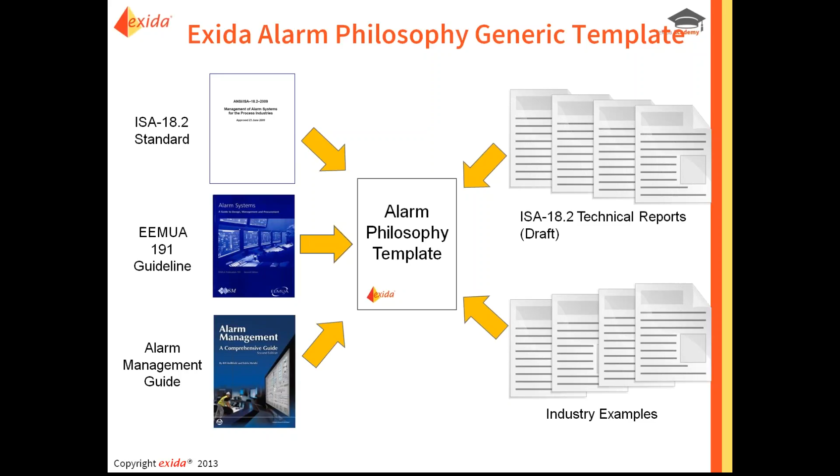I've made reference to an Exida alarm philosophy template in a couple of the slides. I just wanted to show a little bit about what that is. That is a generic document that we've created based on the requirements of the different standards, guidelines, technical reports from ISA, from philosophies created by industry leaders. It's essentially a starting point with a boilerplate of recommendations in it that folks can go through and use to create their own tailored philosophy. And we typically use it as part of a workshop.

So the idea of creating an alarm philosophy, in case it seems to be a harrowing experience, we certainly provide services to help people do that. And that consists of a training class, a one-day training class, followed by a two-day workshop to essentially walk through those considerations, some of which we just talked about, to come up with what would best make sense for your philosophy. So that's an example of things that we do to help folks create a philosophy document.